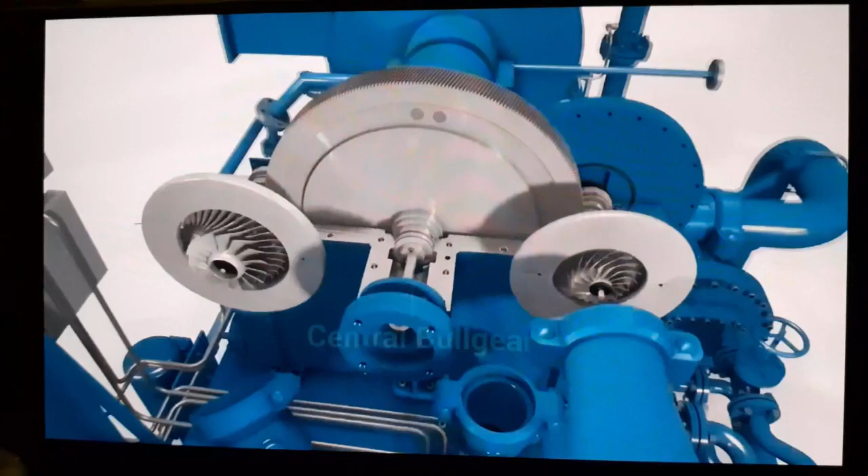Powered by a high-speed motor, the pinions and central bull gear are machined to AGMA quality Class 13.

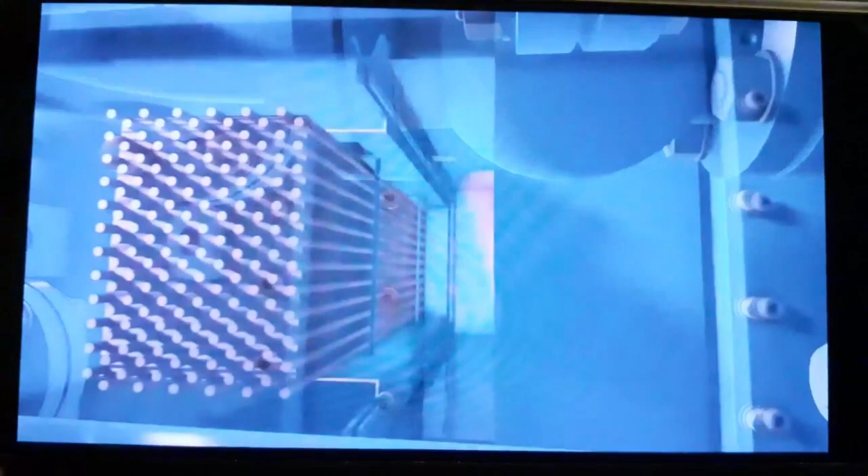After passing into the scroll casing, the heated air or gas flows through the interstage piping into the first stage intercooler, causing the moisture to condensate and separate from the lower velocity cooled air.

Because FS Elliott intercoolers feature spring-fed tubes, cleaning is possible, rather than costly replacement.

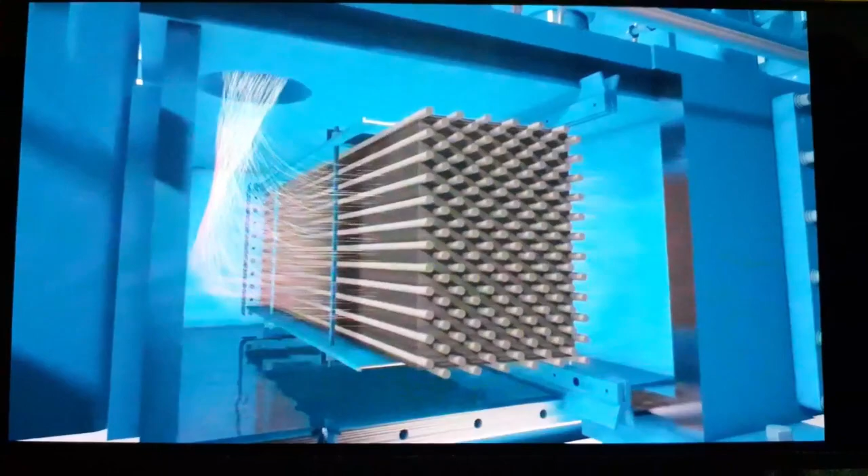As the air travels through the corrosion-resistant plenum, the separated condensate is removed from the compressor through a drain valve located at the bottom of the intercooler enclosure. By regulating the discharge of condensate, the drain valve increases the efficiency of the process by preventing unnecessary compressed air loss.

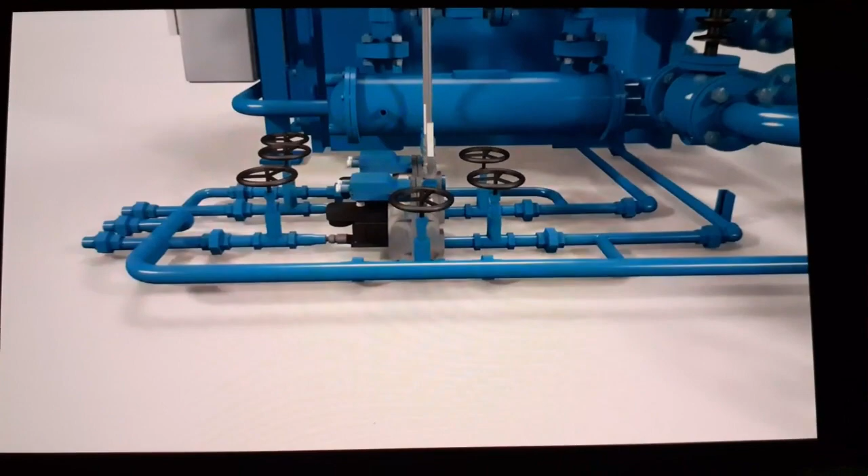Once the condensate is removed, the cooled air exits the intercooler and flows into the inlet duct for the next stage of compression, during which the entire process is repeated.

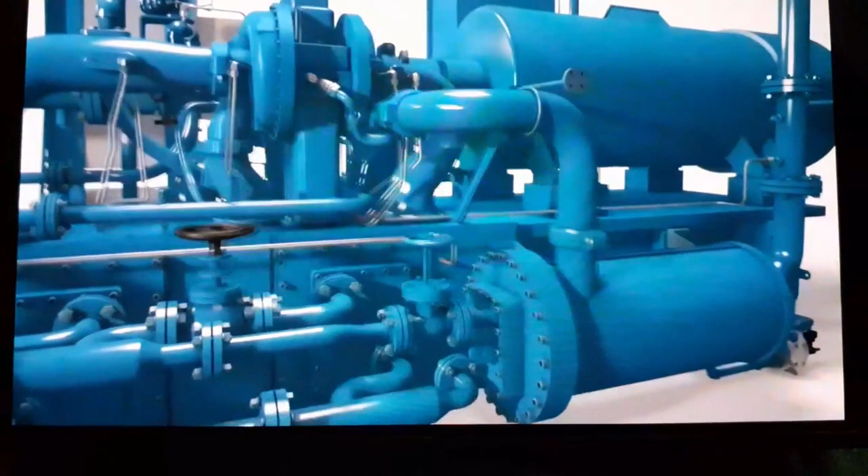The compressed air or gas then moves to the aftercooler, where it's cooled and any remaining moisture is removed.

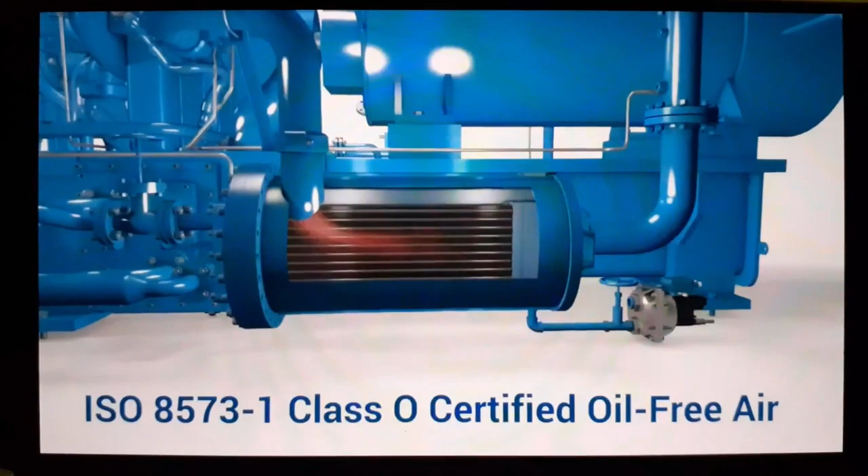This highly energy-efficient process concludes with the delivery of ISO 8573-1 Class 0 certified oil-free air, ready to power a variety of industrial applications.

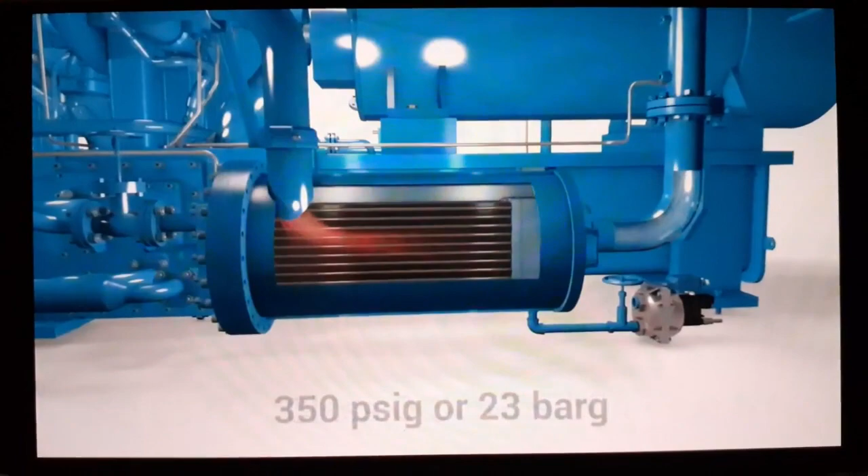Depending on the number of stages within the configuration, discharge pressure can reach...